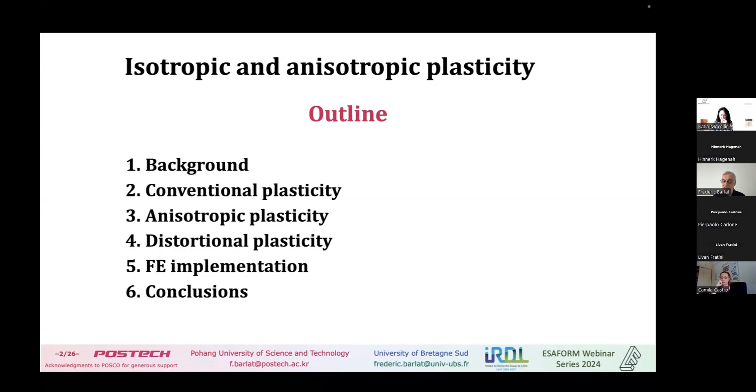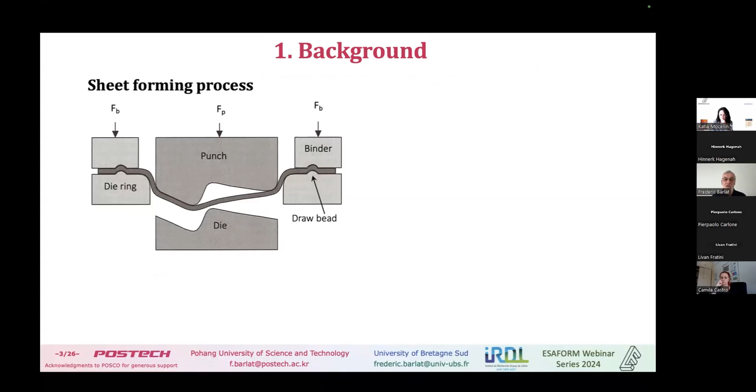So as a background, just this one on sheet metal forming. This is a sketch of a forming process. And of course, we need, if we want to do forming, we need some equipment and something like a press. This one is a small one, this is the one we had at POSTECH in my lab. But industrial presses are much bigger than this one.

Just to say that, and you all know that because we are at ESAFORM, it's very complex to look at the forming process, and there are multiple parameters to control, such as machinery, tooling, geometry, material, interface between tool and material, the scale. We can do something huge and something very small, and also environment can be temperature and so on.

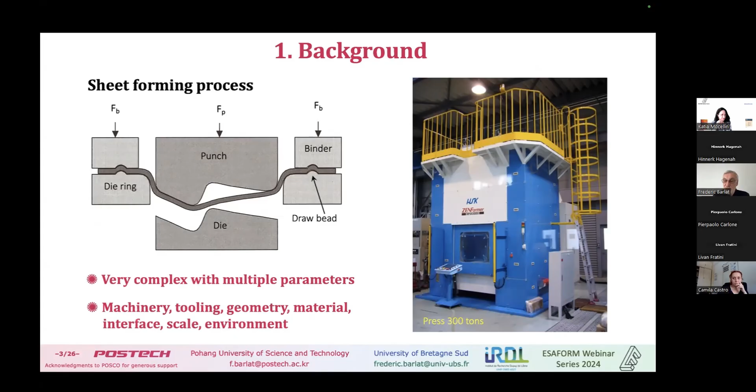There are many things of interest, and of course I cannot look at everything because I don't know everything, and I'm more interested in material and plastic behavior. So especially I'm going to think about the new steel we do right now - not a new material, but really very strong steel we call giga steel, over 1 gigapascal strength, even 1.5 gigapascal.

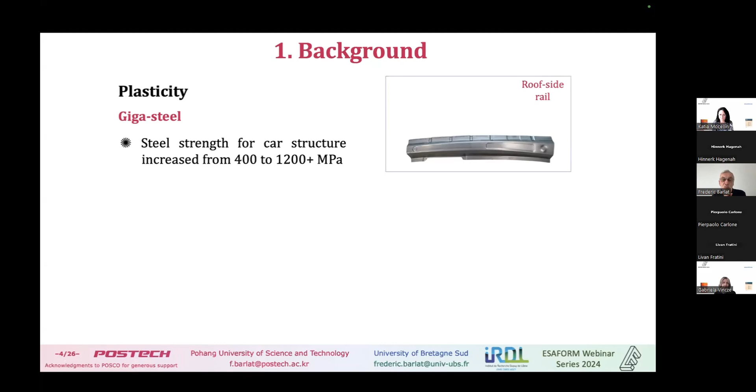I show this example of a rail here. All those examples are coming from POSCO, which I thank for their support in the past.

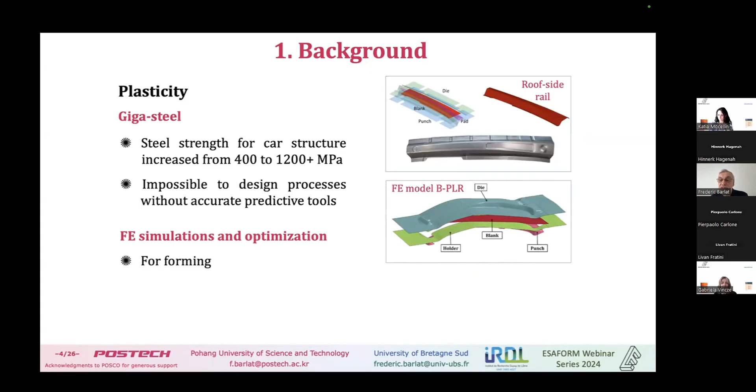For instance, the example of a B-pillar - this is just the sketch with the finite element. But also for performance, and when I say performance, I mean fatigue or crash performance, crash worthiness. So it requires a lot of simulation.

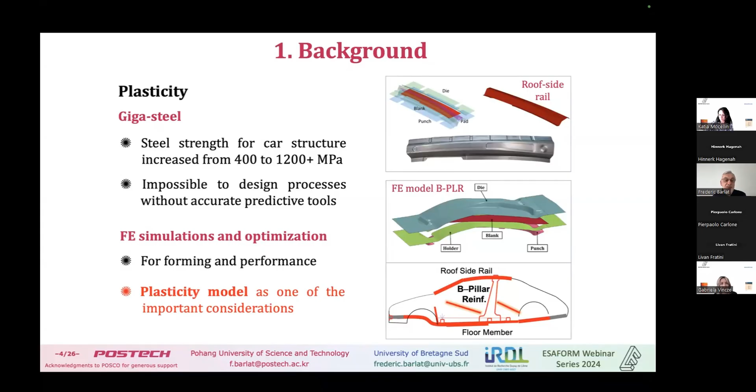In all those types of simulation, the plasticity model is important. It's one of the important considerations - not the only one. As I mentioned before, there are many aspects, but at least plasticity is an important one. So therefore, I will talk about plasticity.

But before that, we can have this question: do we need really a constitutive model? Because AI is coming now and developing very rapidly. Do we still need a constitutive model?

So another way to do it is to use AI to generate a constitutive model and do very fast calculation based on that. The problem is we still need to train the model, and to train the model for a process we don't know yet, because we are designing it.

Well, we need to have a material model, so we fit a material model to some kind of network, a neural network or others, and then we can do the simulation very fast. But for the training, we still need to have a constitutive model, and of course we need a constitutive model that can predict the real behavior as accurately as possible. So therefore, I think a constitutive model is still a very useful tool for the future even.

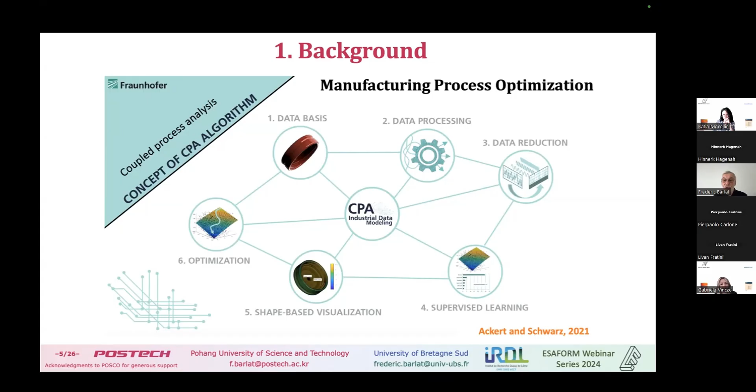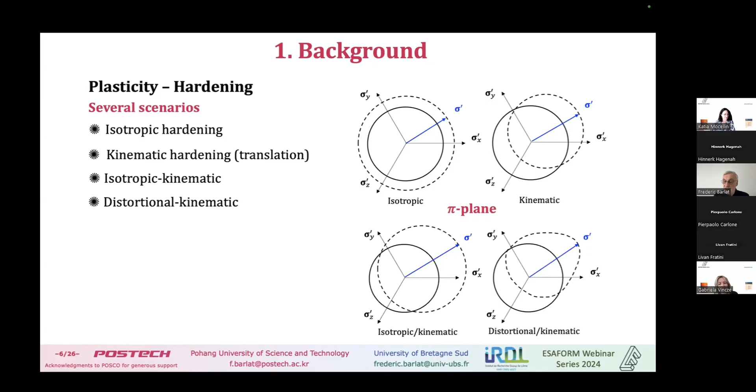Or we have distortional kinematic also, and distortional kinematic came also, I don't know, in the 70s or 80s. But what we've been working on more recently, in the last 10 years or so, is more distortional isotropic, and this has not been done before that - about 10 or 15 years ago is when we started. I'll show you why we chose distortional isotropic rather than distortional kinematic.

There are different scenarios, but usually what we do is - because measuring yield surface is very tedious, but it's necessary to do it - we have specialists about this kind of topic, such as Professor Kuwabara in Japan, and others of course. I have a good working relationship with Professor Kuwabara, and it's very good we do it, but in terms of industrial application, it's difficult to do all the tests required, and it requires a lot of hard and very precise work that maybe industry is unable to do by themselves. So we assume one of the scenarios I showed you and try to calibrate with a few experimental measures.

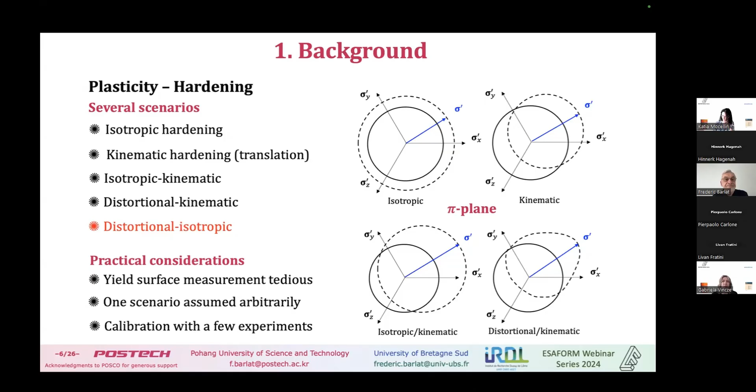In terms of modeling, of course plasticity is full of constitutive models, and I cannot, in one presentation like this, talk about all of them. But I will start with von Mises isotropic. If we know the yield condition, which means the effective stress equals a reference stress, like a stress-strain curve in tension for instance, then this is all we have to define to know plasticity, especially if we assume an associated flow rule, which means the strain increment is normal to the yield surface. So when we have this equation, then we can do simulation, basically.

I represented here with deviatoric stress, but in terms of normal stresses, we can write that this way.

Now, material is rarely isotropic due to thermomechanical processing, like rolling and so on. And usually what we do in sheet metal forming, or metal forming in general, is to use plastic anisotropy.

In case of Hill 1948, which is very well known, it's a modification of von Mises with the coefficients I show here in red on my presentation.

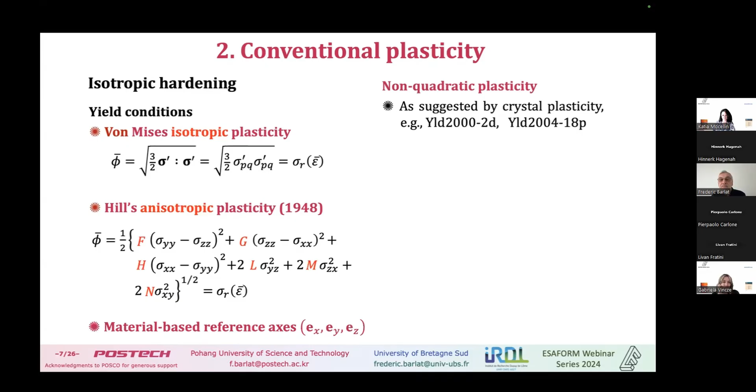But non-quadratic plasticity models were suggested by crystal plasticity, and so this is the reason new -- well, they are not new anymore -- non-quadratic models were developed. And of course there are many others after that, but many of them are based on this one, or using the same method as this one.

So on the two I mentioned, there is a plane stress yield condition, or effective stress, with 8 anisotropic coefficients.

And there's a 3D model which has 16 independent coefficients. But out of the 16 -- actually there are 18 coefficients, but only 16 are independent.

Now we can always use a 3D model, like 2004, can be reduced to plane stress. If you set 3 of the stresses to 0, then it reduces to plane stress, but it's different than the 2D model because we have more coefficients, and more coefficients means we have more accuracy in the description.

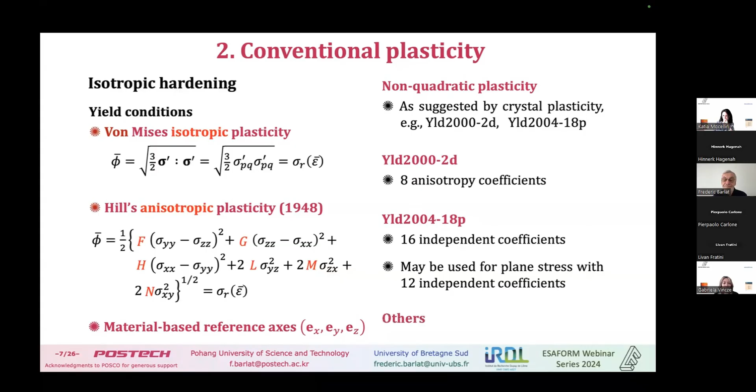I mentioned already we have other models, but I want to talk about an example. It was done some time ago using stack sheet specimens.

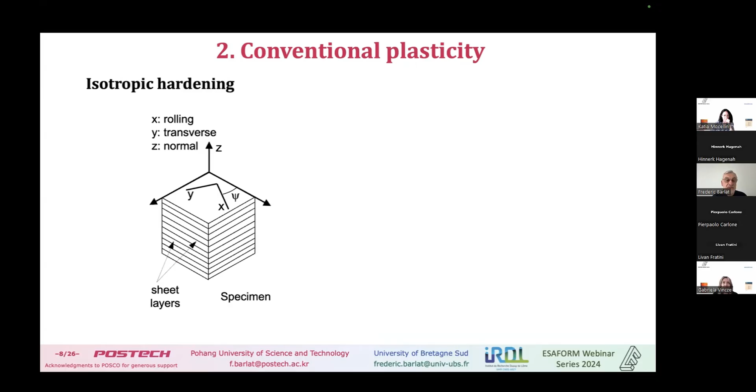When we take a stack of sheet specimens glued together and we do a biaxial compression, we can describe a yield condition in principle in 3 directions, but usually mostly in 2D, as I represented here for an aluminum magnesium alloy, 2.5% magnesium.

So here we have the experimental results shown with a symbol, circle. And we have a simulation, polycrystal simulation, in dashed line, which we don't see with a solid line. The solid line is a constitutive model, the continuum model.

And you see, of course, there's a fit with all those experimental data, but for the continuum model, it's fitted with the data, whereas the Taylor, Bishop, and Hill crystal plasticity model is done with the texture.

But you see that all those 3 approaches -- experiments, crystal plasticity, and the constitutive model 2004 -- they are all giving something like a rugby ball shape. It's not like an ellipse, like Hill.

And of course, we need to do that in 3D. So with the experiment I showed you, we can build a 2D model, and we have to do some other tests, like one representing shear, but it's just projected here.

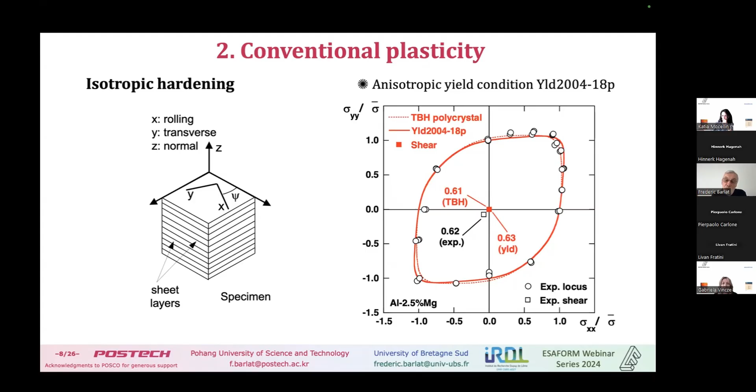We can get an extra point, and the more points we get, basically, is the best. But sometimes we cannot do everything.

So anyway, we need to define this 3D object with experiments, and very often we have only a limited number of experimental data, and that's why the constitutive model must be accurate -- it must follow the plasticity constraint.

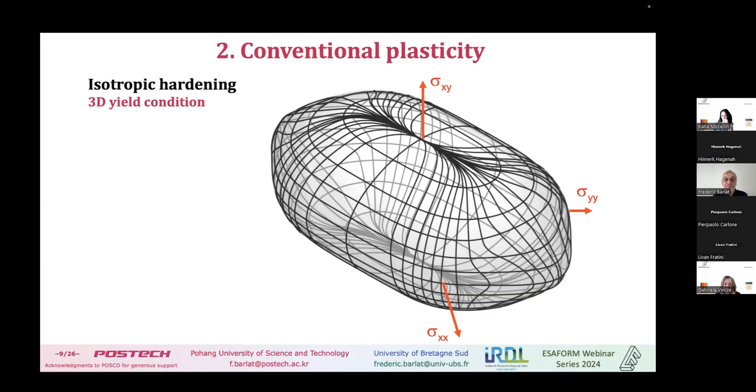And we can, using this -- I will show another example where we do tension in different directions, 0, 45, 90, but others also at 15 and so on. We can measure the flow stress from a tensile specimen, but also the ratio of the width to thickness strain.

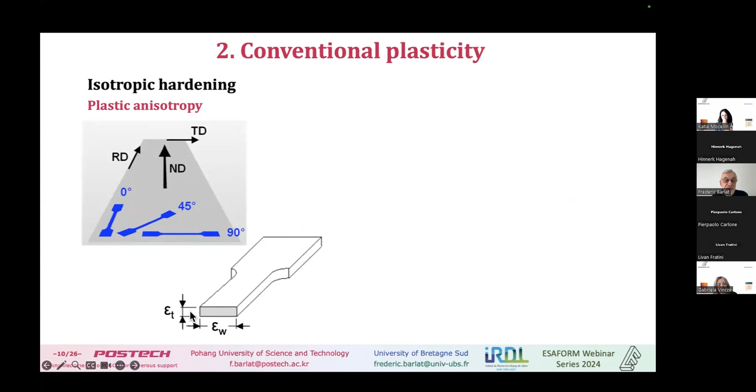This is the so-called R value in axial tension. This is done on aluminium 2090 T3, an aluminium lithium alloy which was developed by Alcoa when I was working at Alcoa.

So the black dashed line represents the anisotropy curve of the flow stress, with a scale on the left side also in black. And all those points are the experimental points measured every 15 degrees.

Now the red curve represents the R value, this strain ratio, shown with the square symbol. And you see that with this yield condition, we are able to represent the plastic behavior quite well.

Of course, this is a fit here, okay? I don't pretend this is a prediction -- this is a fit. But the thing is that with Hill 48, for instance, it's impossible to do such a good fit. And that's why it's important to get the right model.

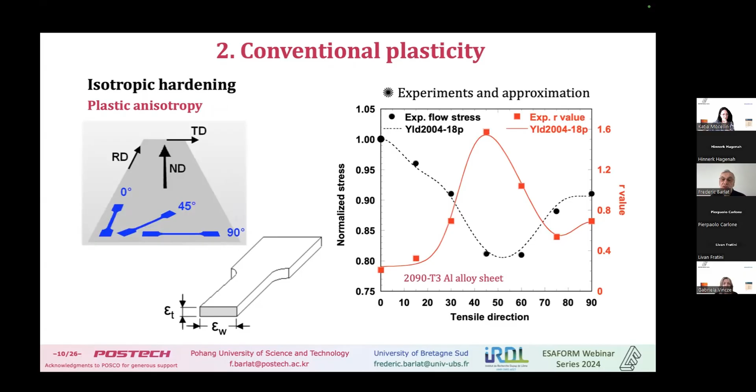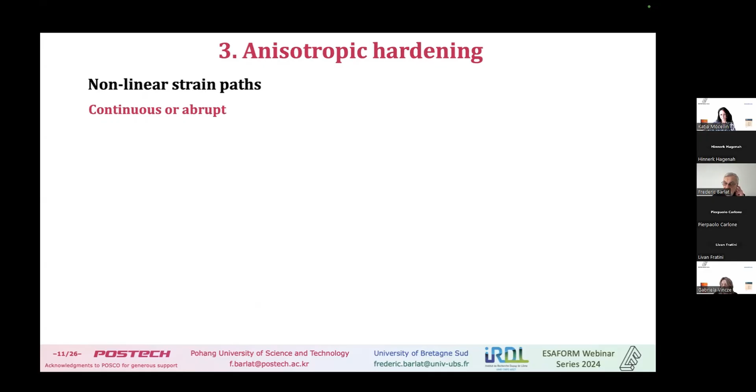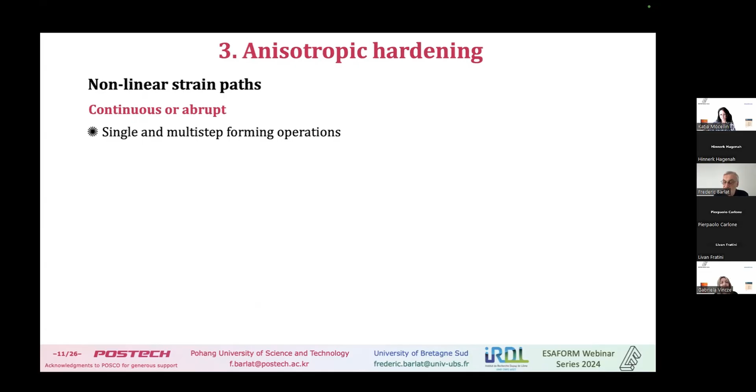So this was, I would say, conventional plasticity. Now I will talk about anisotropic hardening, because in forming processes the strain paths are not linear, and the strain paths usually are changing. Especially in multi-step forming operations, but even in a single operation, strain paths are changing during plastic deformation.

So this is a sketch of a non-linear strain path. They can be curved, they can be linear by steps. So you may have one step here and a second one here, and then you can have 2, 3, 4 steps.

Now, if you do this one, you can go up to this point and come back. This is reversal. So many non-linearities with different pre-strain or even curved strain paths, and everything can be mixed together.

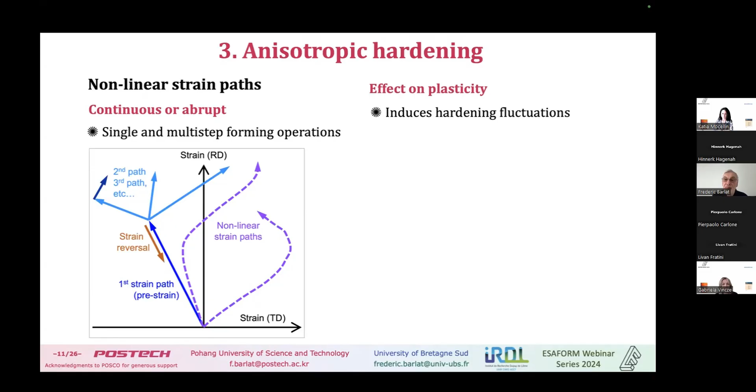And one thing I forgot to mention is the Bauschinger effect. Not only do we reload at a lower stress, but usually we get some kind of permanent softening, where the new curve never recovers the level of the isotropic hardening curve. So we can get all those effects.

And to represent that, because we cannot consider all possible cases of strain path change, we have to rely on only a few changes and assume the model is accurate enough to represent all that.

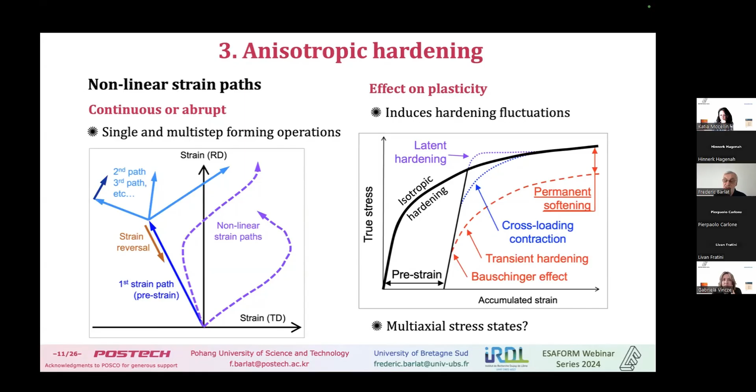So the most difficult case, of course, is for multi-axial stress states. Here I represented the effect in a uniaxial stress state, but what happens in a multi-axial stress state is more complex.

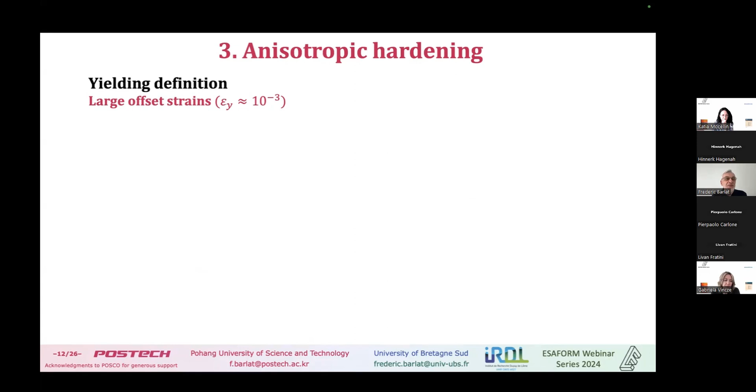So I want to look at an example taken from Professor Tozawa, I'm sorry about the name confusion earlier. It's about plane strain compression, biaxial compression, as I showed you before, using stacked sheet specimens.

And what happens in this example is that it's brass. The first step was rolling, which follows this purple curve here. Then unload, and then reload in a different direction to probe the new yield surface.

This is done after different pre-strains, after different offset strains, like the first curve represented here at 2 times 10 to the minus 3. Of course, if you do lower strain - this is more of an engineering definition of strain - but if you reload at lower strain, you can get a very distorted yield surface, and it becomes very complicated.

Also, between 0 and 0.002, it's a very small amount of strain. So is it really necessary to take this into account? I think so, but I also don't think so - this is just my opinion.

And also what I think is that at offset strain in the order of 10⁻⁵ or 10⁻⁴, it's nonlinear, and therefore we can say, yeah, we have plasticity, but it could also be viscoelasticity. So to me, it's not clear-cut enough that we have plasticity in these ranges. We certainly have something, but I'm not sure the measurement is reliable or not.

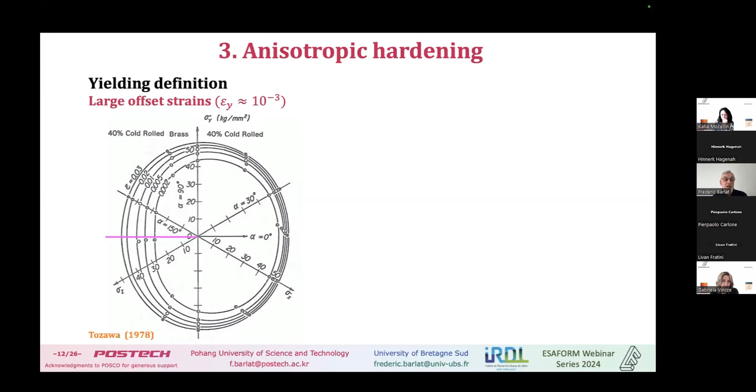This is something we observe also in many reported works, getting some flattening of the yield surface in the direction opposite to loading. I showed you two examples, one experimental, the other more model-based on crystal plasticity. So it looks like distortion is a good model to describe this. This is the reason why we decided to go this way, only distortional, to try to simplify things, because if a material model is too complicated, it's very difficult to use in practical application. That's why we try to remain as simple as possible, although when we start to have nonlinear strain paths, it cannot be that simple.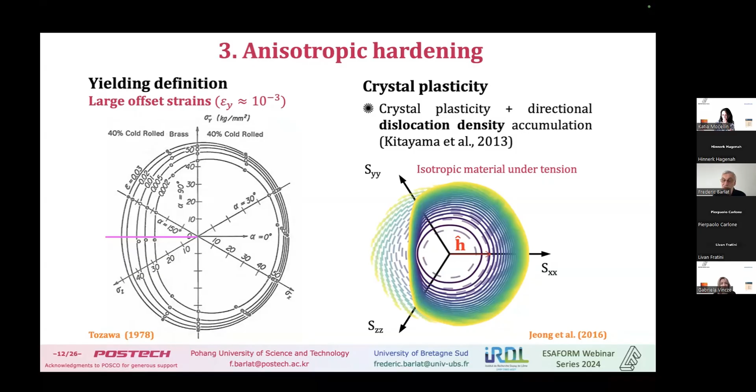So I will now go directly to distortional hardening. Distortional hardening is anisotropic hardening, but I'm making this distinction because I'm going to talk about this distortional only, no kinematic hardening. So I start with a yield condition of the same type as isotropic hardening, which means effective stress. Here I have the effective stress to the power Q, and then 1 over Q equal to reference flow stress. Basically, it's an effective stress equal to a reference flow stress. This is isotropic hardening, even if this function is an anisotropic yield function.

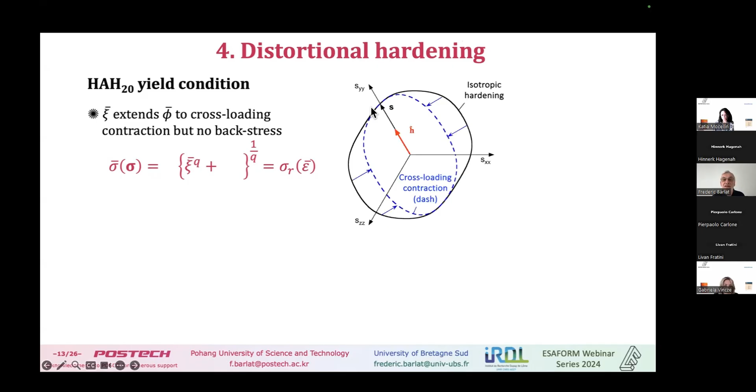And this would be in a pi plane, it would be the solid line. If it's normalized, it would always be this solid black line here. But actually, this is the yield, or the effective stress, but the effective stress is actually this xi bar.

Xi bar is extended to allow for some cross effect. So if you look at the figure, the dashed line would be some kind of contraction that occurs during loading in this direction. So loading in this direction, the loading is S, and I have another tensor here, which I write H, and it represents the microstructure that I develop if I pull in this direction here.

So I'm going to get something like this. It's a linear transformation, actually, that I do, and we get something like this. But if I add an isotropic state variable, G here, and another function which I will show after, then I will create a distortion in the direction opposite to loading. So I'm going to truncate this, the same as I truncate in this location here, and I'm going to have this dashed line, which represents the final distorted yield surface.

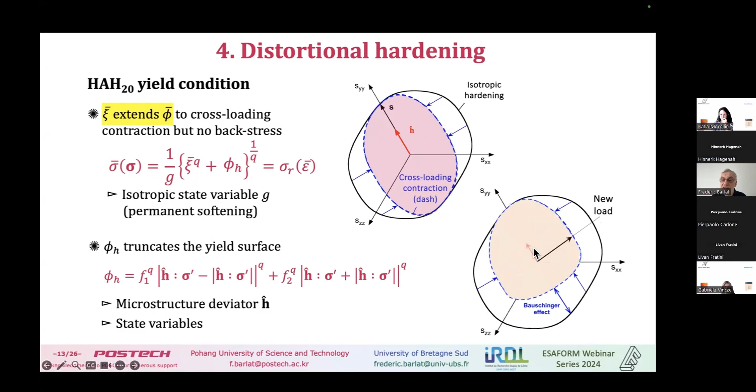And actually, if I want to make some change, so I was loading in this direction here. Now I'm loading at cross-loading here, pure cross-loading, because it's 90 degrees in the pi plane. So the yield surface is going to rotate, and the microstructure deviator is going to rotate as well, because the microstructure deviator tends to align itself with the loading, but it cannot do it instantly. It takes time to change a microstructure. So even if the loading is changed instantly, the microstructure will change gradually, and that's what this rotation tends to represent. Whether it happens like this in reality, reality is very complicated. It's just a model, a way to try to express what happened.

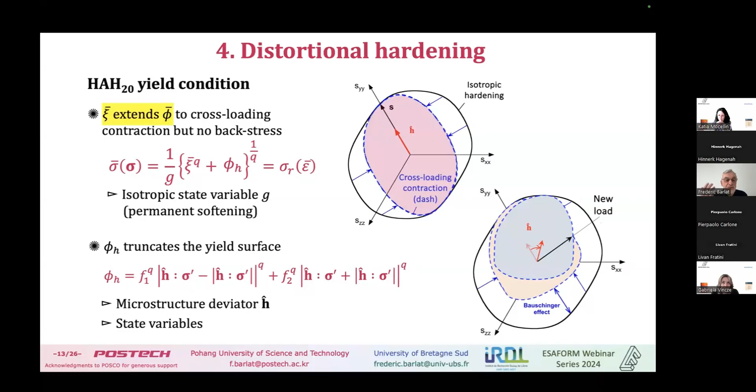We have several versions of what we call the HAH model. This is the isotropic distortional model on a dual phase steel.

So T is for tension and C is for compression, and this one is TCT, meaning tension, compression, tension. We have two curves here with different amplitude for the change, one with a small amplitude and the second with a bigger amplitude. Around the circle are the experiments, and the red line is the model, and it works well.

If we do transverse direction tension plus rolling direction tension, we again do some pre-strain. The experiments on the pre-strain only are represented here. This HAH20, the last version of the HAH model, captures the experiments quite well. The blue line was the former model, HAH14, and we had a small problem here, which is one of the reasons we tried to improve to HAH20.

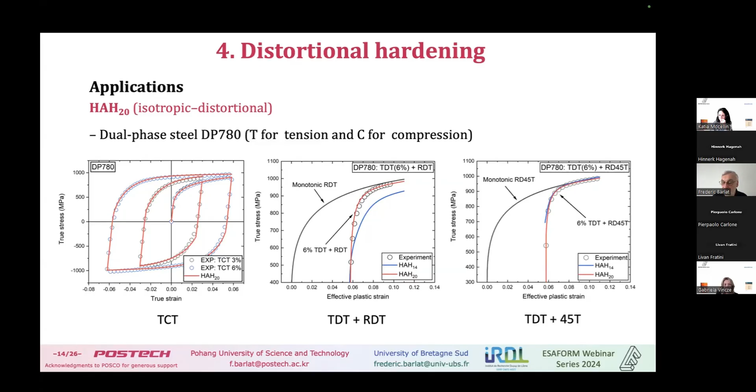So it looks like we would probably be able to capture most of the possible loading. We can also do cycles, and this was done on a martensitic steel with 1500 megapascal ultimate tensile strength. Again we have good agreement here, with this one curve: tension, compression, tension, compression, tension. Again we have good agreement between experiments and simulation.

And here, this is an aluminum alloy, with some kind of cycle plus tension, and the model represents this behavior quite well.

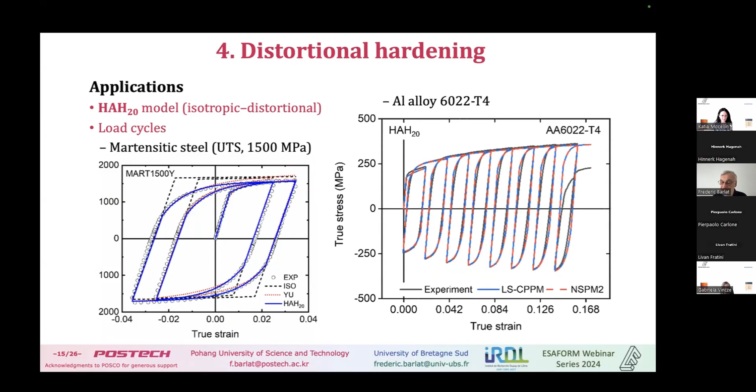Now I'm going to talk about an approach still based on isotropic distortional, which we call HEXAH, the most recent model. It's a little like HAH, but we don't have the large rotation of the yield surface when we change strain path, as I showed before. One reason is that it's difficult to capture the coefficients correctly when we have this rotation. We noticed that, and it's difficult to represent exactly what we want because the rotation is a difficult concept to handle.

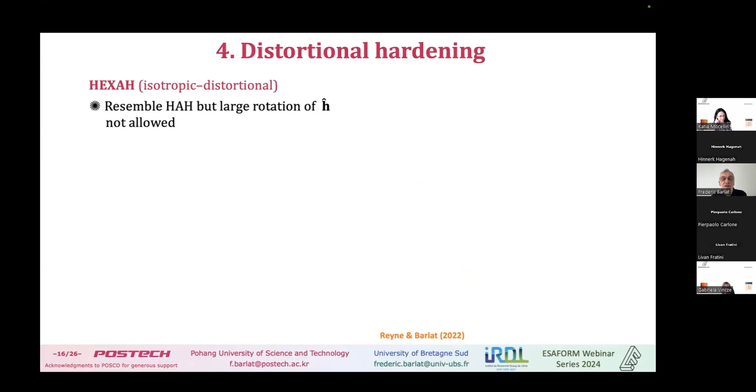in this case I'm going to generate a new microstructure deviator. So I'll have two microstructure deviators here, one vertical and one horizontal. And if I change strain path again, I'll add more deviators, like H2, Hn, so we may have many deviators in principle. But only one is assumed to be active, which is the last one, and all the others tend to recover the isotropic hardening stage, and are actually removed when they don't contribute to the yield condition.

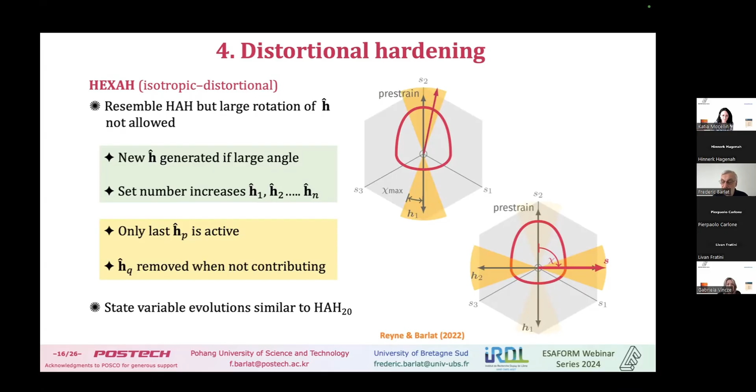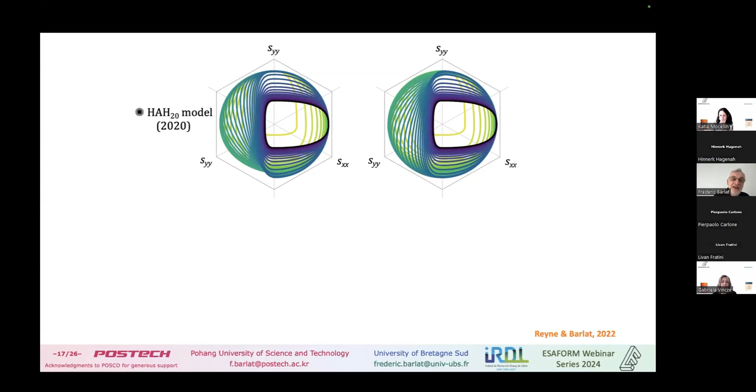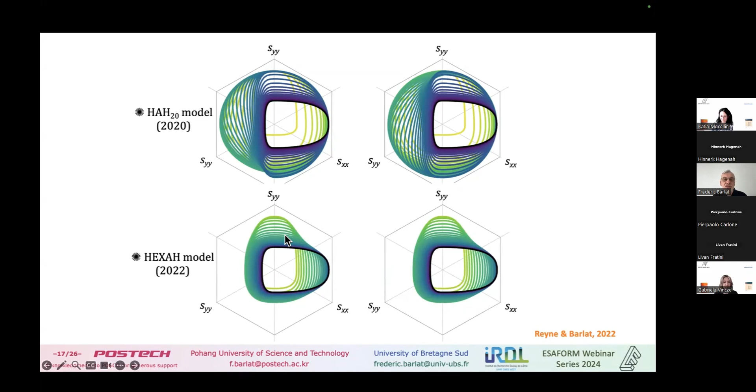And so it's kind of a singularity here. And this is the reason why HEXAH was developed, because we don't have this singularity. If you look at the two yield surfaces, this is the same example as the top row with HEXAH here. And we don't see any difference at all in the shapes.

And I have some video to explain that. Usually, okay, let's see that. So here I'm going to compare HAH14 and HAH20.

Okay, so you see that during the transition, the shape is not exactly the same, especially HAH14, because actually one of the purposes of HAH20 is to make the evolution more similar. But it cannot be similar exactly.

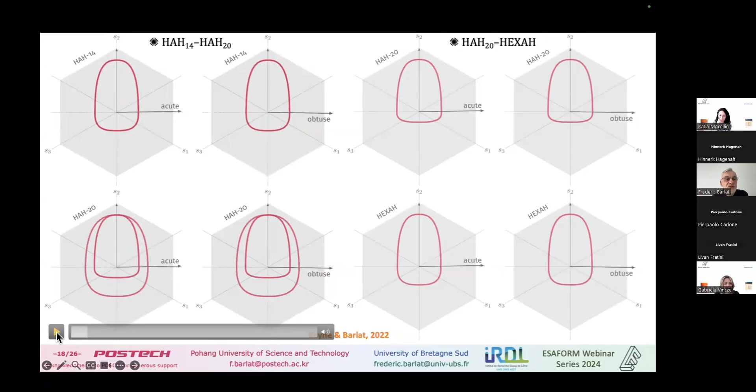And if I do that again, I will stop at some point. Okay, you see HAH20 is more or less the same. Oops, this is not what I wanted to do. I wanted to go progressively.

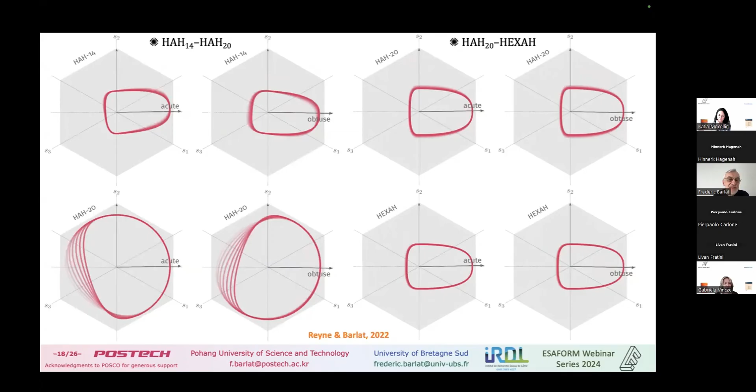You see here now, we see that still HAH20 is not exactly the same in its evolution. Oops, okay, sorry again, but okay, another time. Okay, but at the end, similar.

Now, if I look at HAH20 and HEXAH, so HAH20 is here, HEXAH is there. Okay, this is what we see. And now, if you look at the bottom one, HEXAH, you will see the evolution is exactly the same.

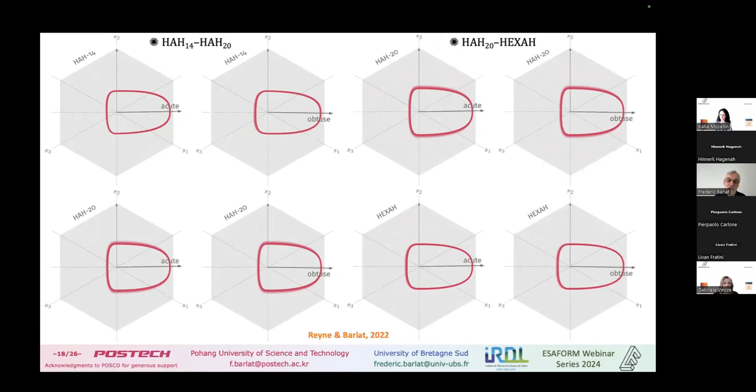Okay, so we don't have the singularity anymore, and this is a good thing. Singularity is never good, especially mathematically speaking. So that's why we wanted to avoid this.

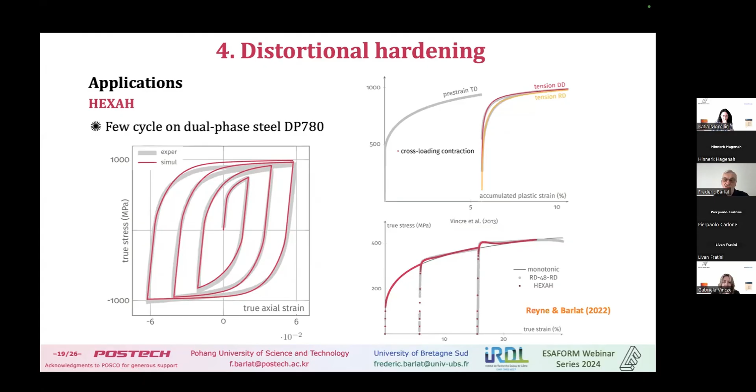So even if we have a good plasticity model, we need a good implementation if we want to get good results. And this is the purpose of this section.

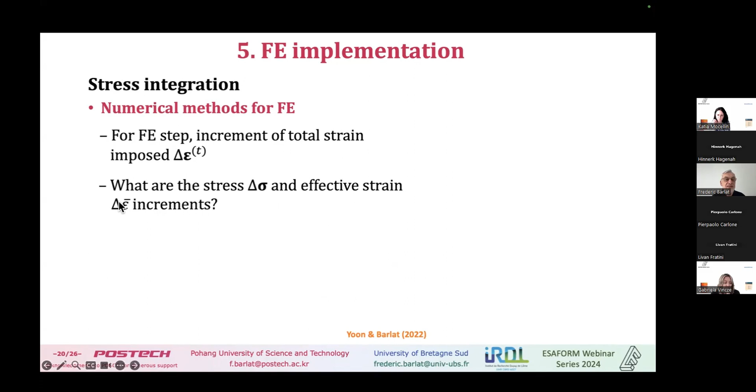We need to integrate the stress. And there are many ways to do this. So basically, at a given step, we impose the next step, which is a total strain we impose. And we want to know what is the stress increment and the effective strain increment.

So the most used method, the most powerful method, is the closest point projection method, or CPPM. It's the most accurate, and basically it's Newton-Raphson. But this is a method that takes some time, because we first assume a prediction using an increment that's totally elastic, and then come back iteratively to the solution. And this takes some time.

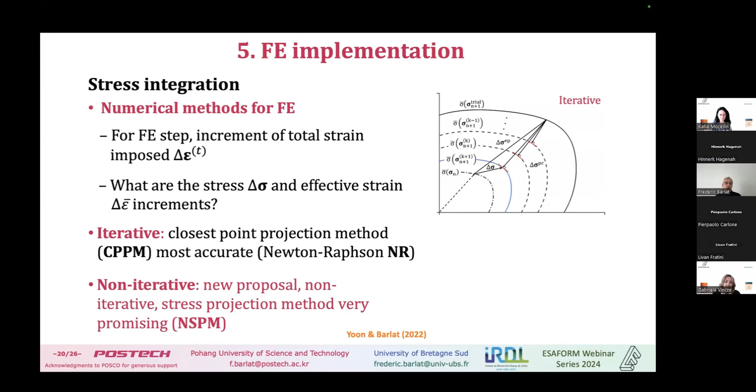And the reason we wanted something simpler and faster, maybe not as general as this method, which can be applied in many problems. This one is more specific. The one we developed is more specific to metal forming. And this is a non-iterative method, which as indicated by its name is non-iterative because we use an elastoplastic predictor first. And this is represented by this. Okay, we just go directly to the solution.

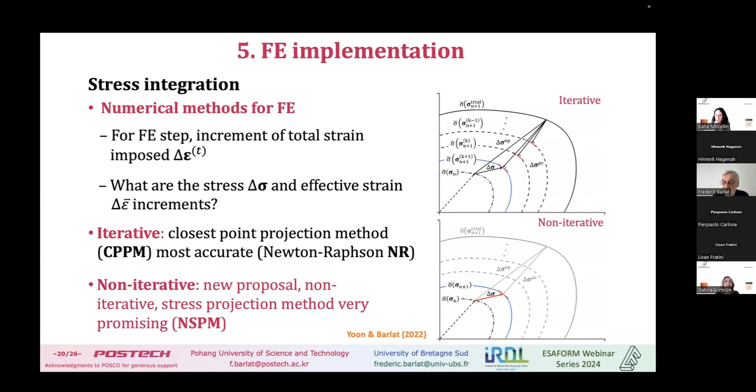It has been done in the past, and it was not always very accurate, and maybe that's one reason it was not used much in the literature. In this formulation, although we say it's non-iterative, we still have to do a projection.

We first find a stress update elastoplastic, and the problem is when we do that, we are not exactly on the yield surface. So we have to project onto the yield surface to get exactly the loading point. If we're not at that point, and we have state variables that must stay between limits, the code is going to crash.

So in order to make sure we are on the yield surface, we project the stress we found just before onto the yield surface. When we do this, we actually get a good integration.

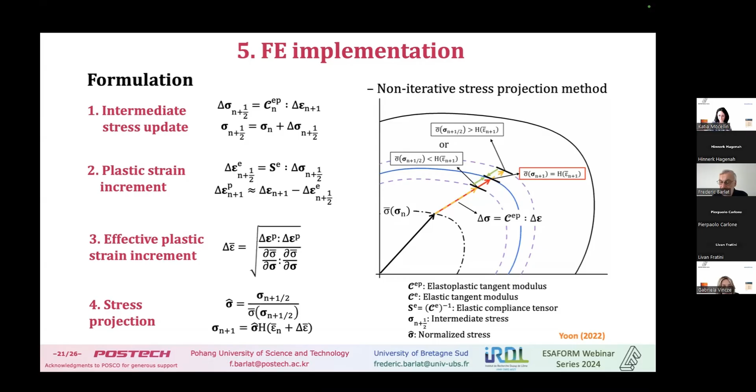So just to show, it's difficult to compare, but if we compare the two methods - CPPM, which is fully implicit, and NSPM, which is fully explicit because it's only one step - we represented the stress in different elements, I think it was a square cup in this case. If you look at the two, the stress in both cases is the same.

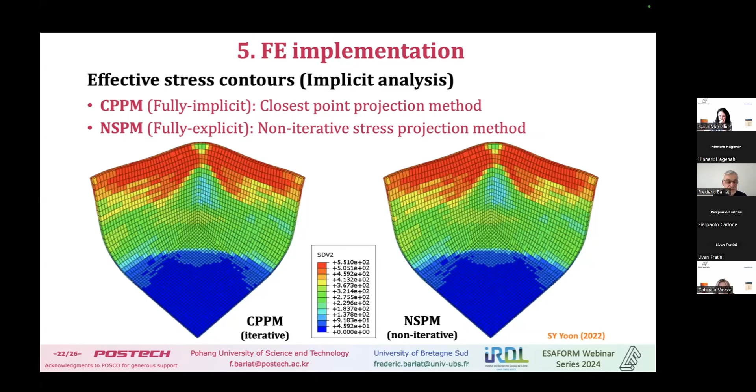Maybe there's a very small difference, and it's almost impossible to see where the difference is. Actually, when we do the simulation and represent it with those two methods, we get the same results.

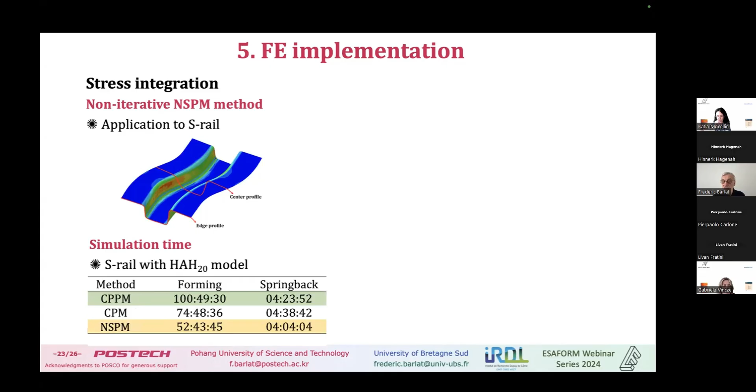For springback it's about the same, but we still save a lot of time for the forming steps. This was done with a Yoshida-Uemori model, and we got about a 50% reduction in time. We did this with HAH20 too, and got about the same time reduction.

So you just need to compare the red and the blue, because that's the only comparison I'm talking about here.

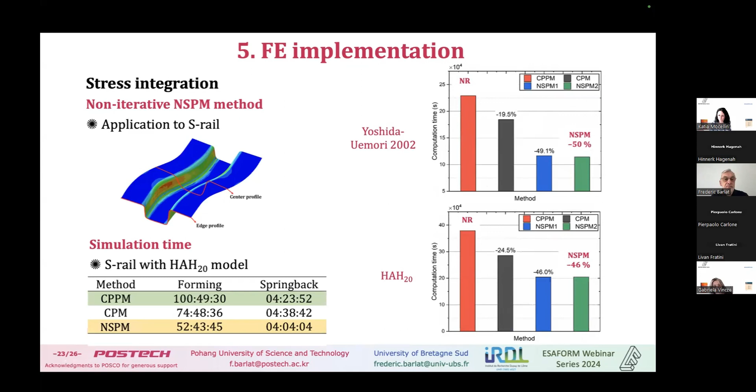Application to a B-pillar - I'm just going to show one result, because it's impossible to measure anything on this type of complex part, but just to show you the simulation. This was done with LS-DYNA, I think.

The part is quite complex, with a lot of contact, and very often codes crash before finishing the simulation. But with this stress integration method, we are able to finish the simulation. Here, for instance, the material was TRIP 1200, which I didn't mention before.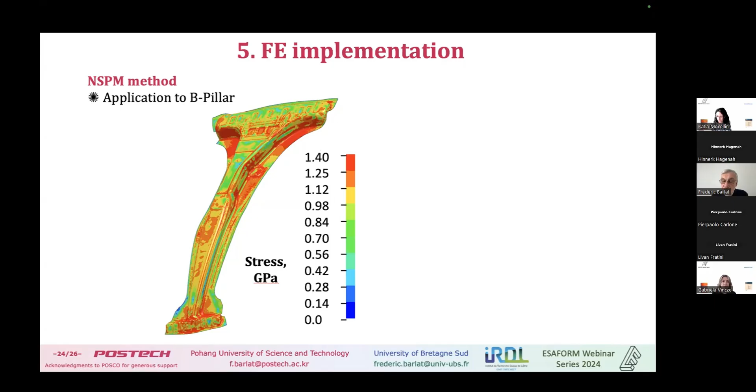We see that some stress is sometimes 1.4 gigapascal because of the hardening, but anyway, we're able to finish the simulation.

Here we can look at whether the material experienced some strain path change. Red is monotonic loading; blue means we had reverse loading; and green means that not far before the end of the simulation, we had some cross-loading.

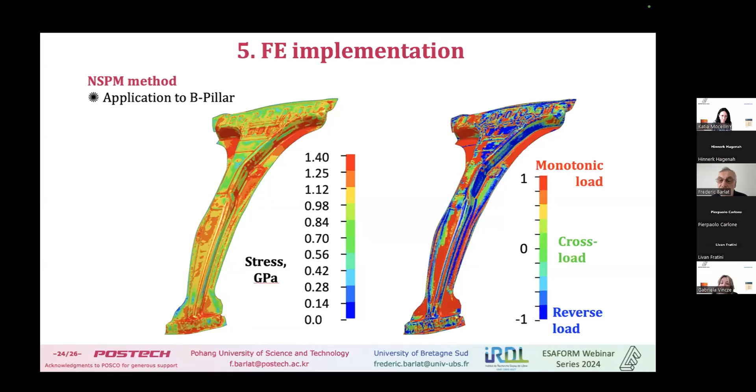Now, we have a UMAT that my student - he's not my student anymore, but my former student - put together, including these new integration methods along with many different constitutive models, even some fracture models. It's all available on this site.

So I will leave this presentation with you, if you're interested, and you can check the website yourself.

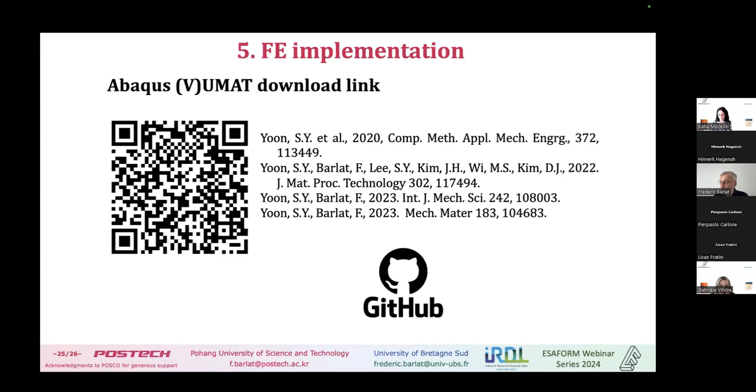Okay, I hope I'm not too long. Well, I was a little bit too long, but anyway, sorry about that.

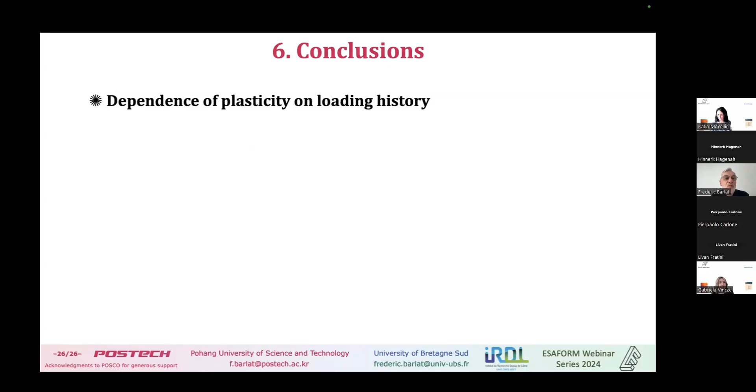So in conclusion, we observe that there is dependence of plasticity on the loading history, and with a model based on distortional plasticity only, without back stress, we are able to represent the behavior quite well.

I showed you several aspects of the microstructure, like the texture, dislocations, and so on. So physical understanding is important to develop the model at the continuum scale.

I think constitutive modeling of plasticity and its finite element implementation is still an active research topic. I think AI will be very useful, but as a complement to quantitative models, which I believe are still very important in my view. I hope you will all be interested in this topic.

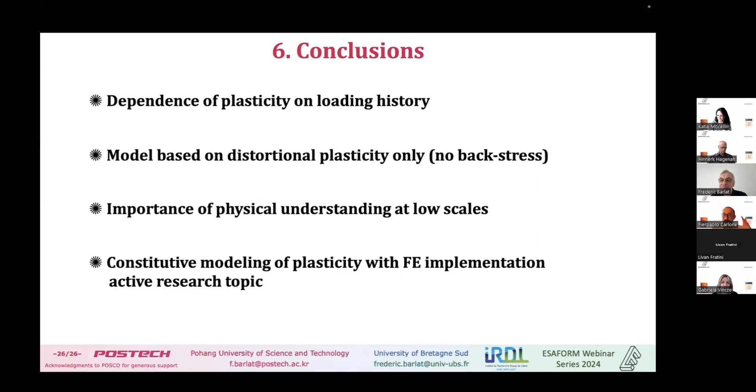Thank you, Fred. It is us thanking you for guiding us through this journey through isotropic and anisotropic plasticity and all the details and theories you showed us. It was very interesting, in particular looking at what we can get from simulations implementing all these advanced modeling approaches. So thank you, really. Thanks, Pio.

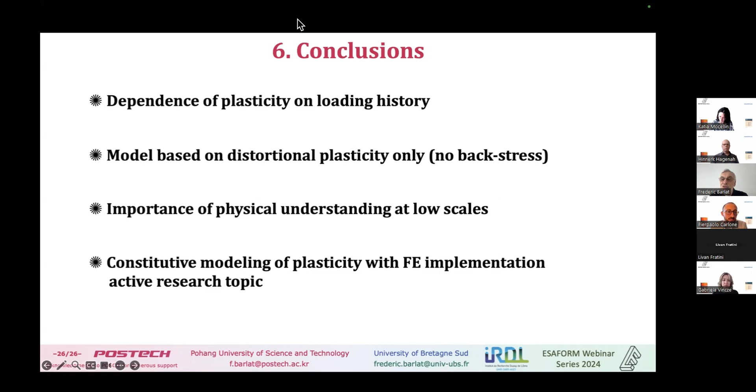Yes, completely right. So thank you again for your presentation and discussion, Fred. It was really our pleasure to have you, to host you here. Thank you very much. Such an interesting presentation. It was really an amazing journey.